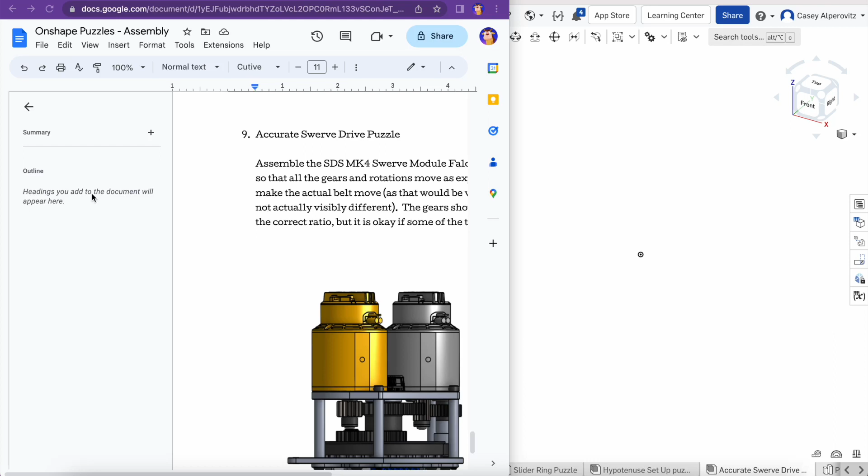Accurate swerve drive puzzle. So assemble the swerve so that all the gears and rotations work as expected. If you were putting a swerve drive on an actual CAD of a robot, you probably wouldn't go into this much detail, because you don't really need to model how the wheels work to do math in CAD. But if you were designing the swerve module itself, like a custom swerve, you might want to model how each one of these turns, so you could figure out if everything's working correctly. It's also a good puzzle, and it will help your CADing skills.

So you need not make the actual belt move. That would be near impossible, and it would look the same, since the belt always is in the same position. It's just the teeth on it that are rotating, and the belt in this model doesn't even have teeth. The gear should turn correctly with the correct ratio, but it is okay if some teeth overlap a bit.

Okay, so what model was this? I think it was the same one from the other one. Okay, MK4L2.

So let's insert from MKCAD. We'll go to our swerve section. This is not grouped together, I remember, so all these parts are floating around.

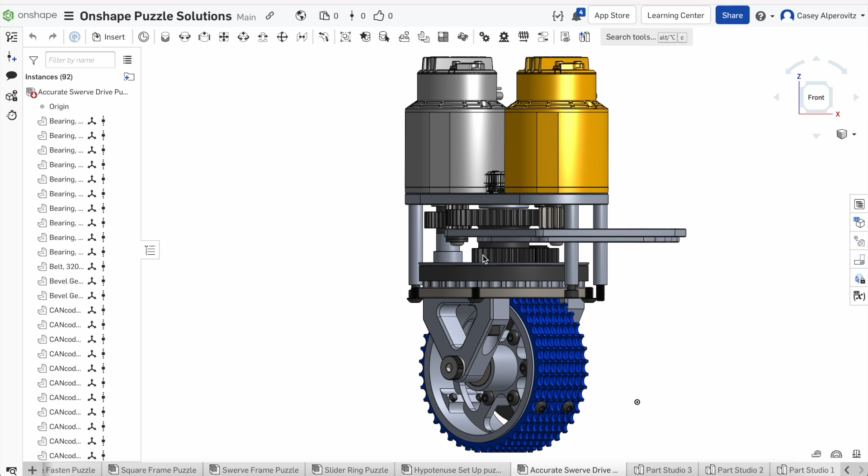This one's gonna take a bit, there's a bunch of things we need. First of all, I don't want parts moving around that aren't supposed to move around. So let's just group it all as one thing for now, and then we can divide and conquer later on. That wasn't the right term - we can ungroup it later on and change things.

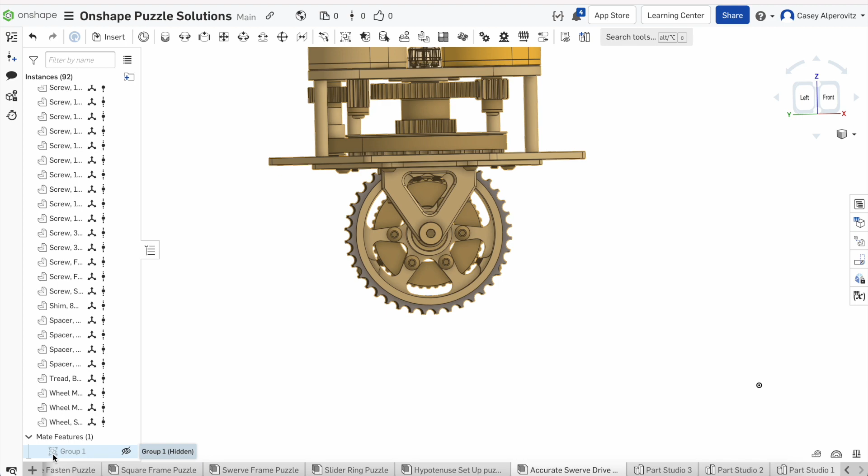So the first thing that I think needs to turn is the wheel. Let's start with the wheel. We want to ungroup the wheel from the rest of this assembly. I could select every part, or let me just delete this group, and I will group together the entirety of the wheel. Let's make sure I get all of it.

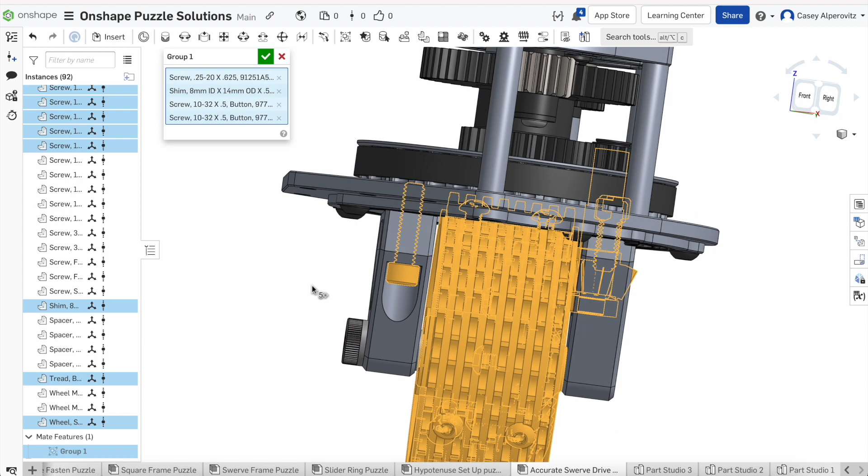We want to exclude these parts, because this is where the wheel will rotate upon. This part was selected, it doesn't need to be. These screws were selected, and they shouldn't be. These screws should have been selected, because they may not look like it, but they are part of the wheel. This part shouldn't be selected. This part shouldn't be selected. This screw attaches the frame, so these shouldn't be selected. This screw shouldn't be selected. Okay, I think that's the whole wheel, but if it isn't, we can always change it later on.

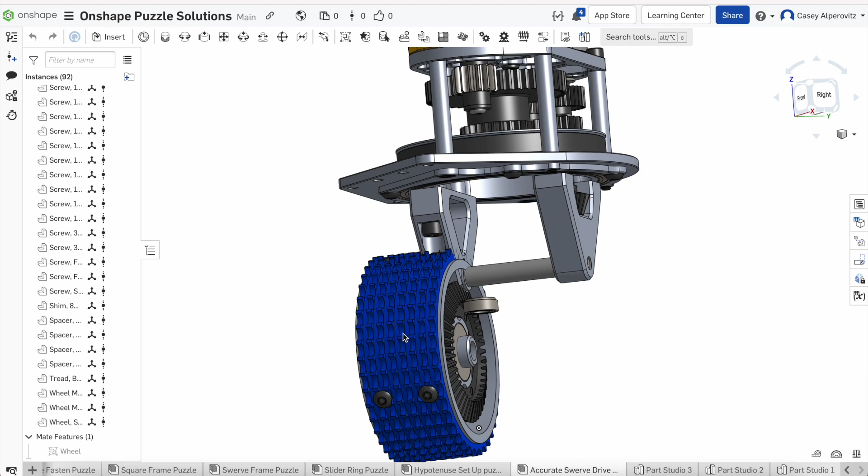Wheel. So now this is all one. Okay, if we drag it and see anything that looks like it's missing... Oh, what happened here? Where is that part from?

Yeah, what does this part do? This part looks like it attaches to here. So, I think I need to unselect that. There we go. And now that the wheel, I think this is like this - these are actually offset a little bit. We can drag our wheel away, and for now, we can group all this.

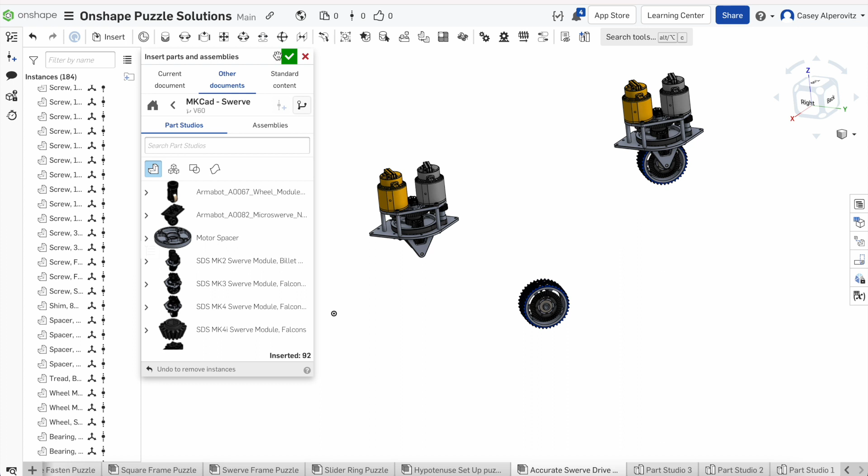Let's actually insert another one of these so we can refer to the right dimensions. This will be our reference model. Now, we want to do a revolute mate for this wheel. Oh, I see, this axle wasn't even part of the wheel. How far away is the wheel from...

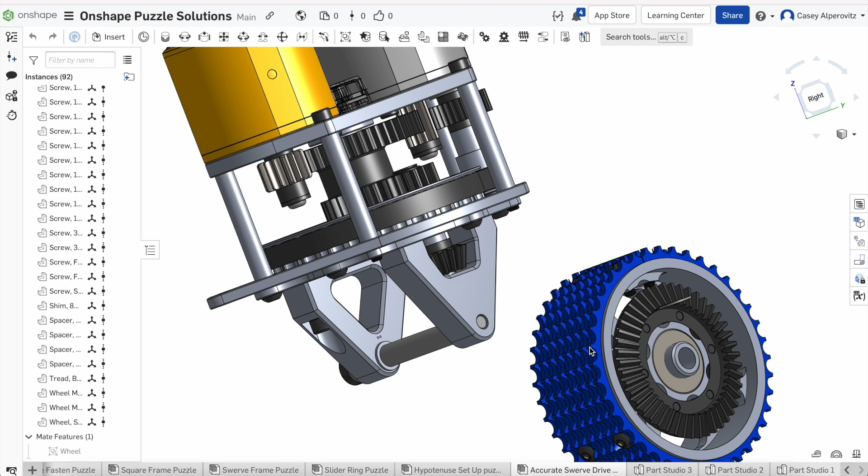Oh, here's another part I forgot to drag out of the group. So, let's go back and do that. This is going to take a while. Okay, let's figure out what that part was again - this little part right here. Shim 8, okay, that's easy, because that's right here. And we can just unselect it. There we go, yeah, now I think I've got it working.

I'm assuming... Oh, I didn't mean to do that. Is this right up against here? Yes, it is - face tangent angle. Let me check. Huh.

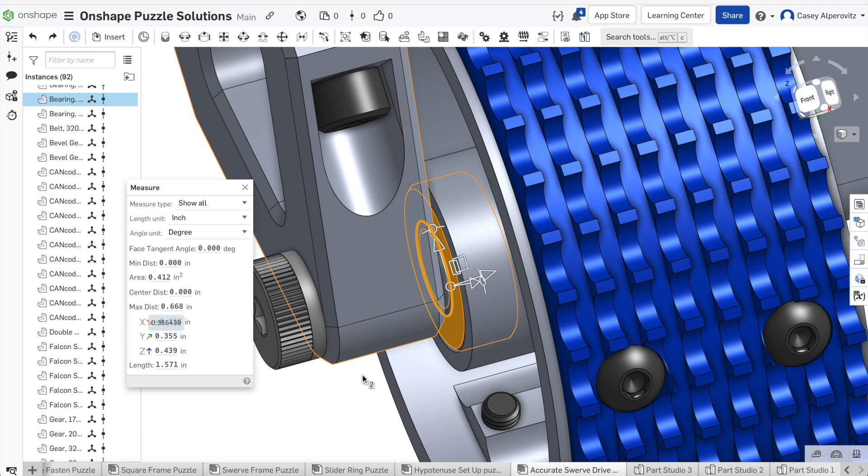Okay, how far away is this from... The wheel's getting in the way now, so I will unselect... I will hide the treads temporarily. You know, I'll hide this part too. There we go. How far away is this plane from this edge? Is this a nice number? 0.048, okay, that looks like a nice number.

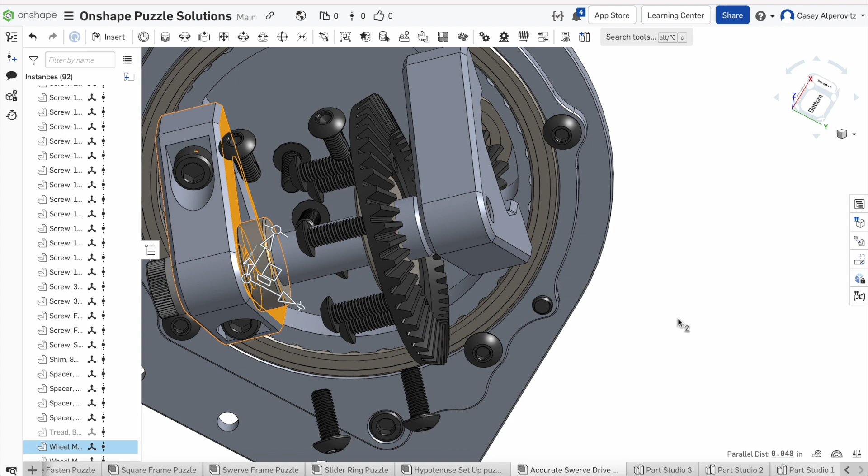So, I can create a mate connector. Let's put it on here and then move it. That - 0.048, it didn't copy apparently. Oh, I moved it in the wrong direction. Why'd it do that? Oh no, I moved it the right way, I just didn't select the right thing.

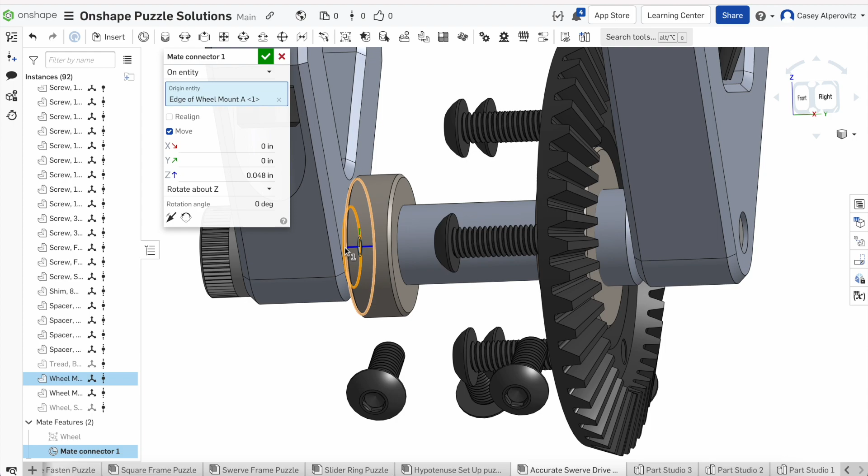We want this circle. Okay. Now, let's unhide those things again. And we'll do a revolute mate between the edge of this and our mate connector.

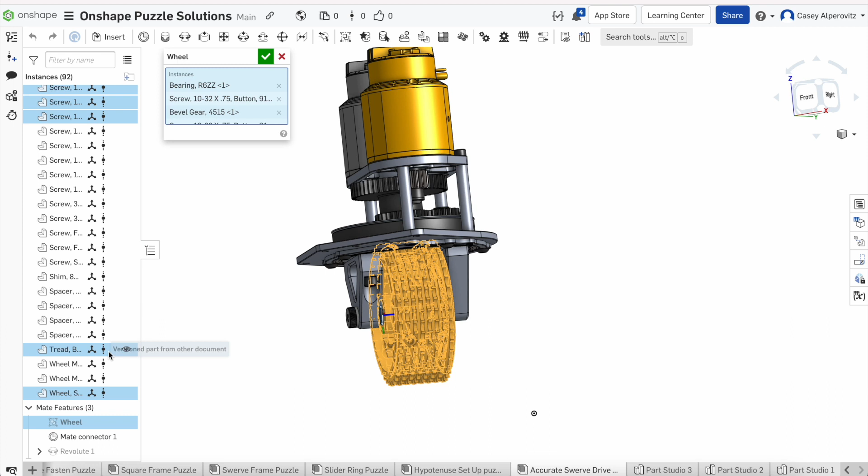And this is not going to spin because this whole part is... Oh, what happened there? Oh, I see why - because I went too far back and I had not grouped the whole thing together. So, give me a second. I can select every part in the wheel by double-clicking on this and then doing this and hiding all the parts in the wheel. Then I can select everything in here and group it again into its main group. Then I can select the wheel parts again and show all of them.

And now, let's mate this to the origin. And now this wheel should spin. Yay! Okay, we did our first step in many steps of getting that to work.

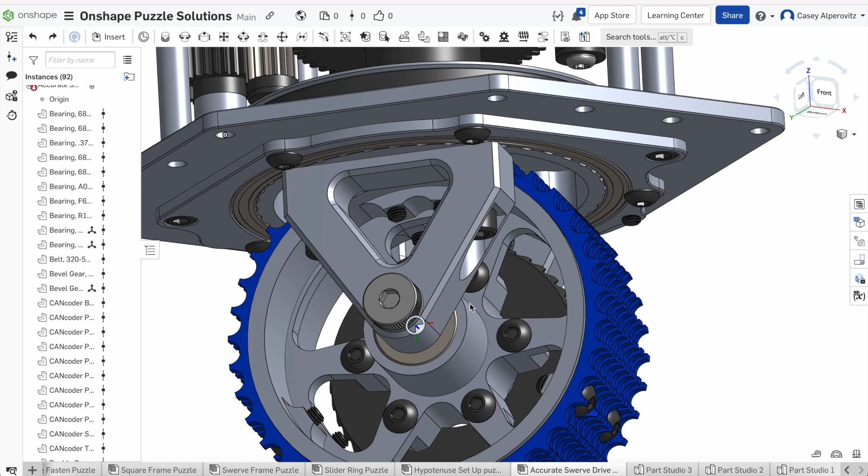Okay, I'm back. So we've got this to move. What's next? This whole base part should spin around so we can change the orientation of the wheel. But right now, it's all grouped together as one.

So we can ungroup this. Let's remove our big group. And I don't want to drag anything here, because then that will happen. So let's see, we'll create a new group. This is all one part, or there are multiple parts, but they should stick together instead of having to fasten each part individually.

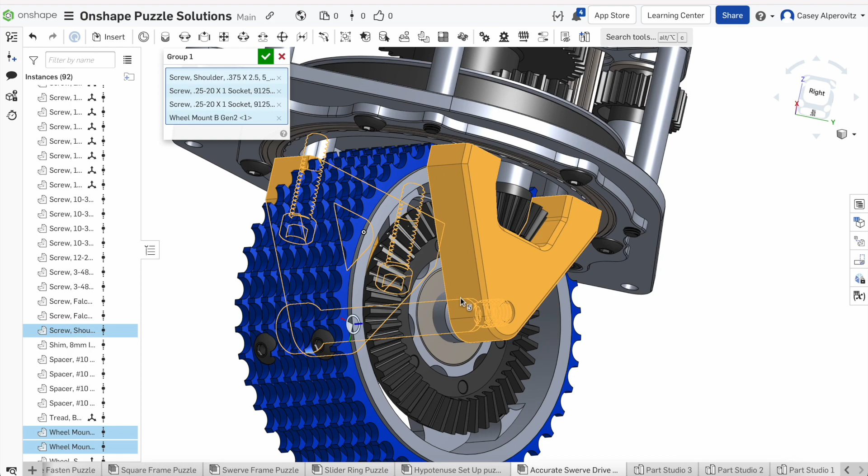This whole part rides on this, and it connects to this, because this whole thing will... Let me check something, actually. Is this right here, is this one part, or is this two parts? Okay, no, that's one part.

Let's go back to our group. Is that everything up there? Okay, these gears will need to turn, but for now they are attached to the same thing. So let's include them in our group for now.

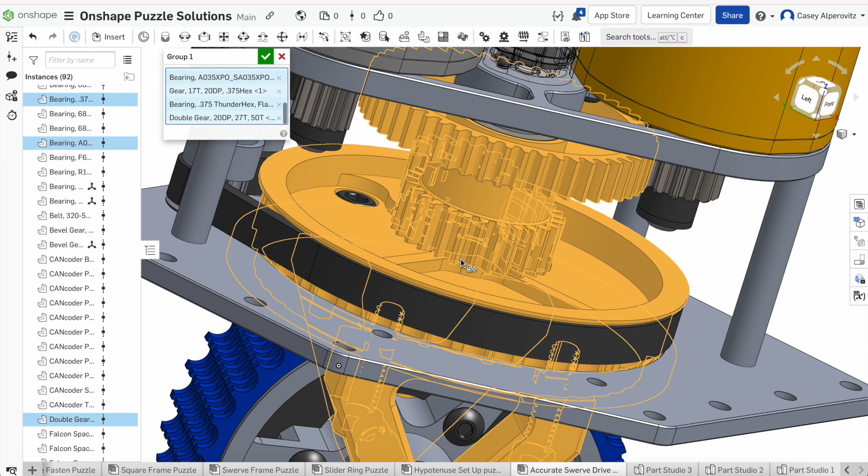No, actually, these parts are attached to the main frame. And okay, that looks like it's all one group. We'll call this center mech for now. Oh, or apparently just center, because I hit enter accidentally.

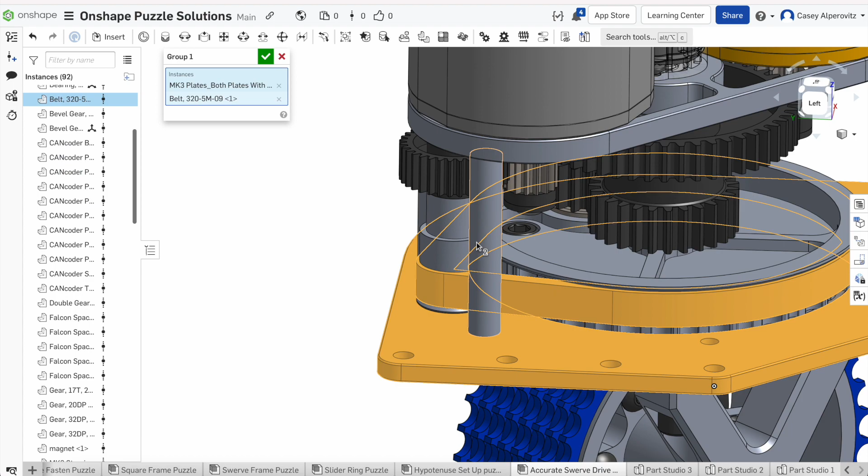And then everything else can go in its own group. Let's select this. These motors are all one big part. Oh, all of these are individual parts. Yikes. Okay, I could just drag over them and hit group after that, but I've already done this. So I'll just... Am I missing anything?

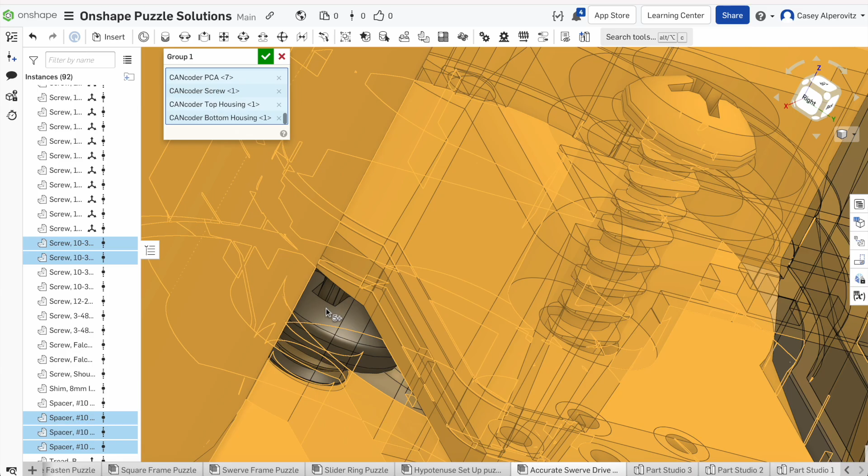How do I get to that screw? Okay, yeah, I'm going to do what I just said I was going to do. I change my mind a lot when I'm CADing.

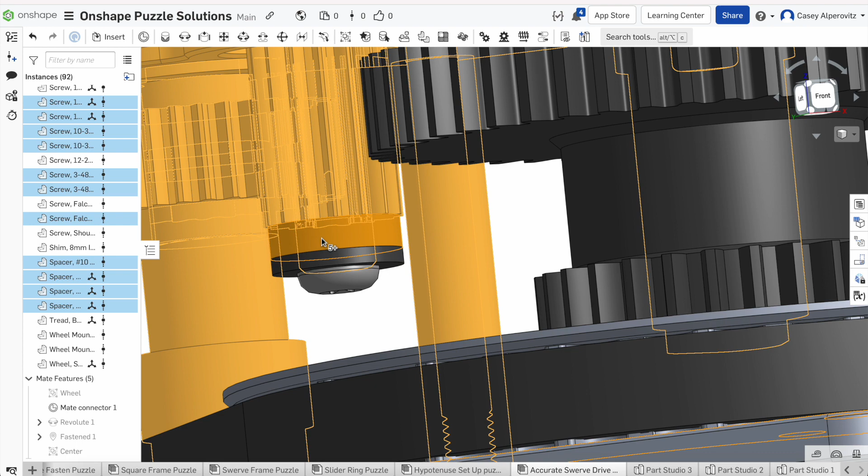Okay, we just select this. That. Select the screw, this part, the gear. Let's select a face, and then it will all form one big group later on. And I think that's all the parts. Let's group it and see if we're missing anything.

It won't let me... Oh, of course it won't let me move it, because I fastened this part to the origin. Let's try moving this, though. Did I forget any parts?

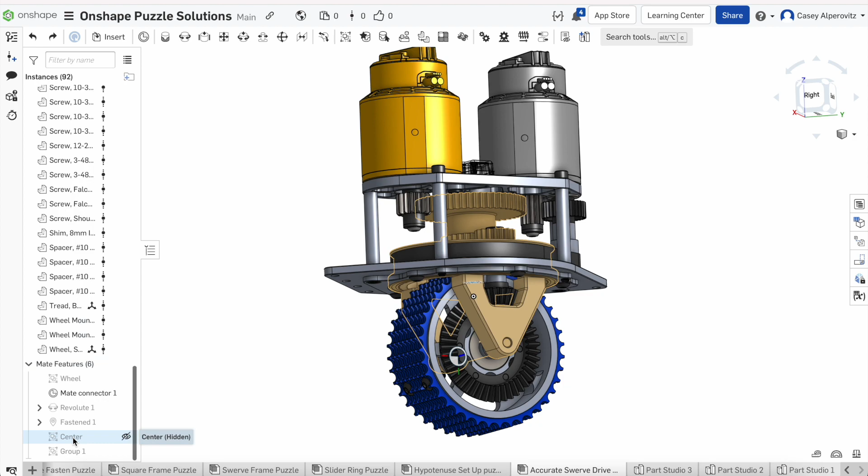Okay, these two screws are floating out in nowhere. And for the time being, this part should be attached. Should it be? Center. Should I attach this part? Let me think about this.

I want this whole part to rotate. So this whole part should rotate around this. So maybe I don't want to select the actual center. Yes, that looks right.

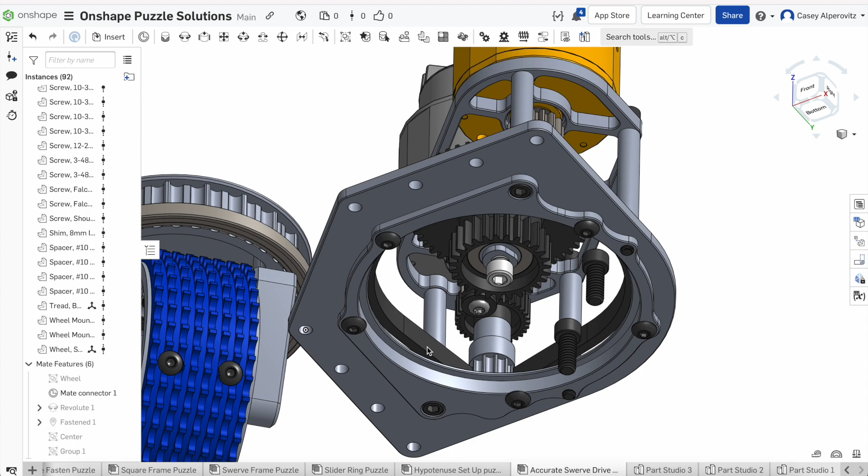Let me make sure I have everything that I need. Those two screws are still floating around. Where do they go? Here they are, include them. And now I think I need to include this part in the big group. There we go, that looks right.

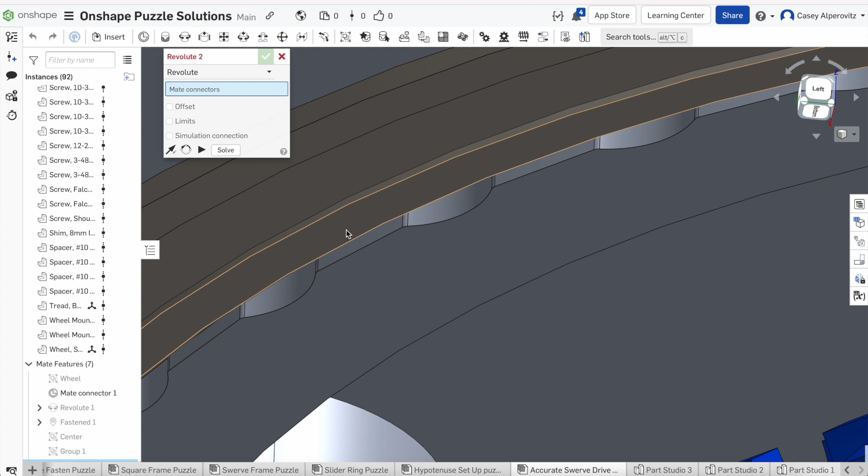So this part now needs to rotate. So, revolute. How do I want to do this? If I select here, that will select the center of this hole, and I'll attach it to the other group. Nope, I didn't select the full ring. Let's redo that.

First of all, let's make sure this and this are at the same height, which they are, because I don't want to change the height of something I don't need to. Let's take the center and the wheel, select them, and hide all the parts just so we can see a little better for a second.

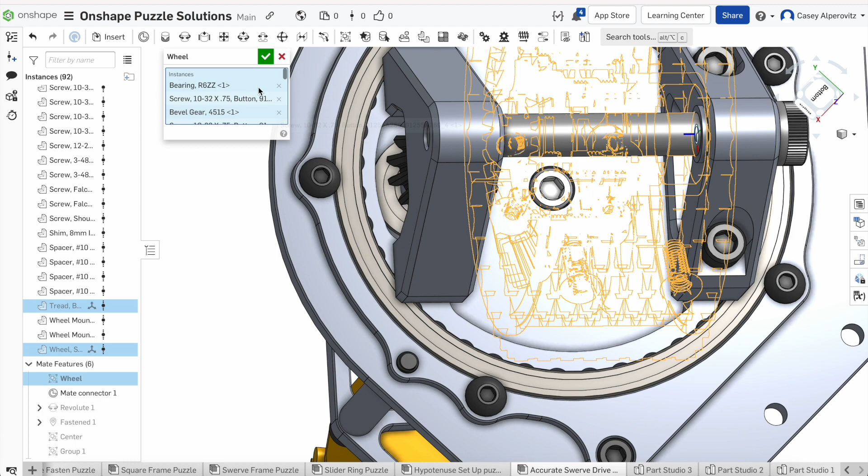Okay, so let's select this revolute mate first. There we go, we got the center now. At first I was like here, and then the center of gravity for the whole part slightly over. Okay, that makes things a lot easier.

Let's bring the center and the wheel back. Show. Where's the wheel? Show. Oh no, I showed the actual symbol for the grouping. I'm going to go into here and then do show. Revolute. Now we need to select our other revolute mate, which can be off of here.

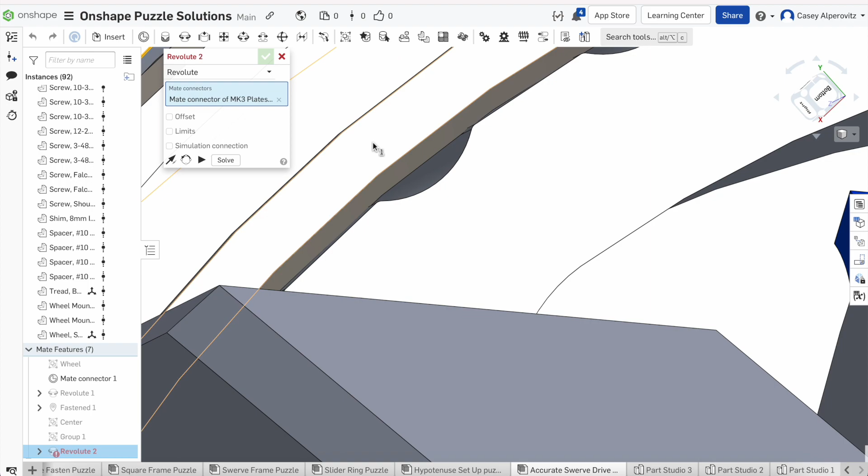Or I'm assuming that's the same height. Let's go off the part we actually checked was the same height. And this rotates. And this rotates. I'm going to undo the position I just moved it into for reasons that will become... Actually, it shouldn't matter. I was seeing if these gears would actually be aligned at the start.

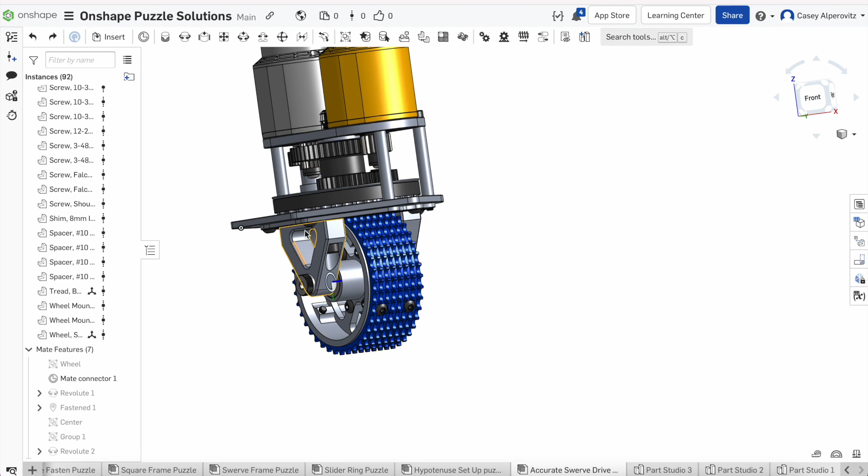No, these gears are overlapping in parts. And that part doesn't matter. It just... having them not overlap, if you can, makes it look nicer. But we're not really going to worry about that. So we got the wheel spinning, and we got this part rotating.

Now, what else needs to rotate? This whole middle section, this tower, needs to rotate. How do we want to do that?

Group 1. Let's unselect these from the center. You know, the wheel's getting in the way. We're going to hide the wheel again.

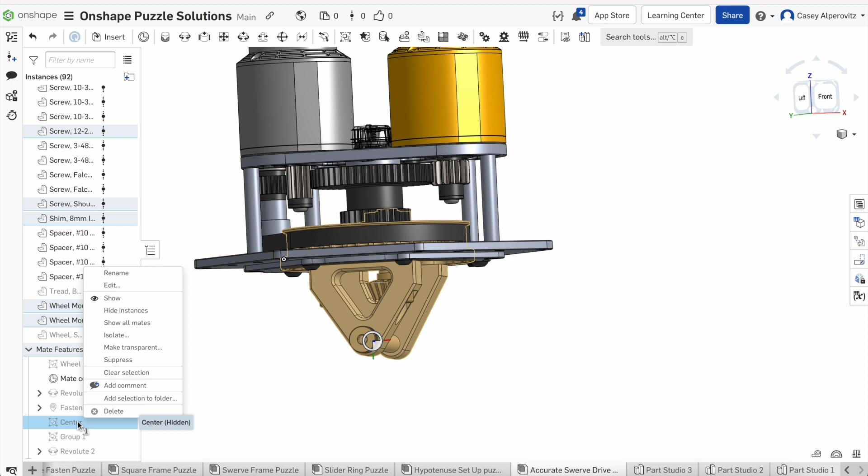Double click, hide. Let's also add the whole center part. Okay, group 1. You know, just so it doesn't move around, this part should also be included in group 1. The screw should be included in group 1. The belt's not going to actually move in our model, so this should be included in group 1.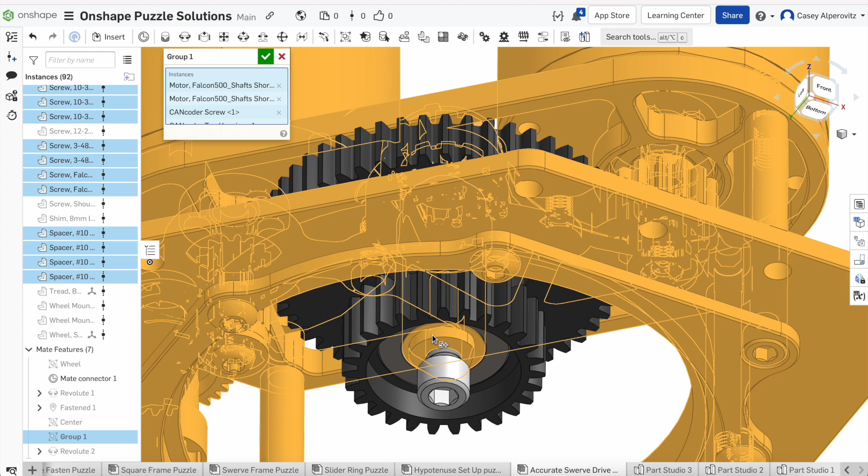Okay, now this should also probably be included. Now let's figure out, because we want to make this part move, are these at the same level? Yes, so we can place a revolute mate there without offsetting anything.

Is this the center or the center of gravity? Okay, this was the center of gravity, see the little mark? But that's not always the center, especially since this part is curved. So I'm going to select the outer circle, and that will center that.

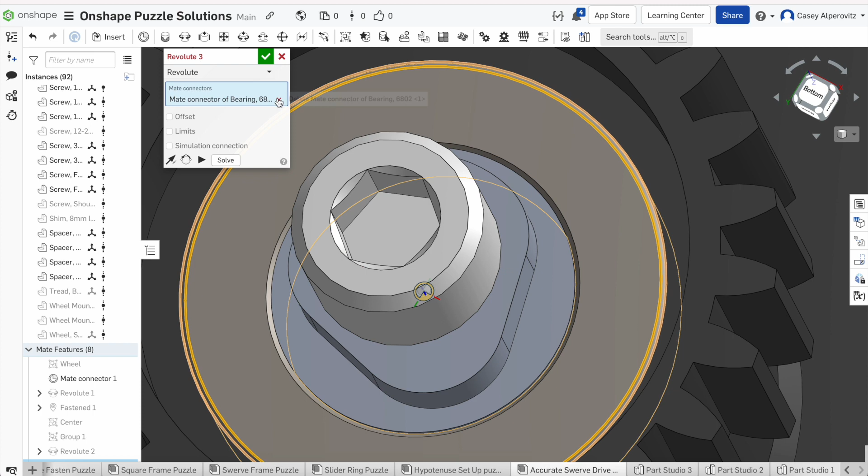I selected this, right? And then we'll select this. And these are now on the same thing. I can test it, make sure it works by...

Huh, oh I see, what? Well, that wasn't supposed to happen. I see, what did I do? Oh, it's just this part spinning and it's not visible. I need to group these things again. Group this to this. Now, hopefully... there we go.

That's spinning. Now, while we have those other parts hidden, let's get everything that's supposed to be spinning up here spinning as well. So this whole axis is supposed to spin. How do we want to make this spin?

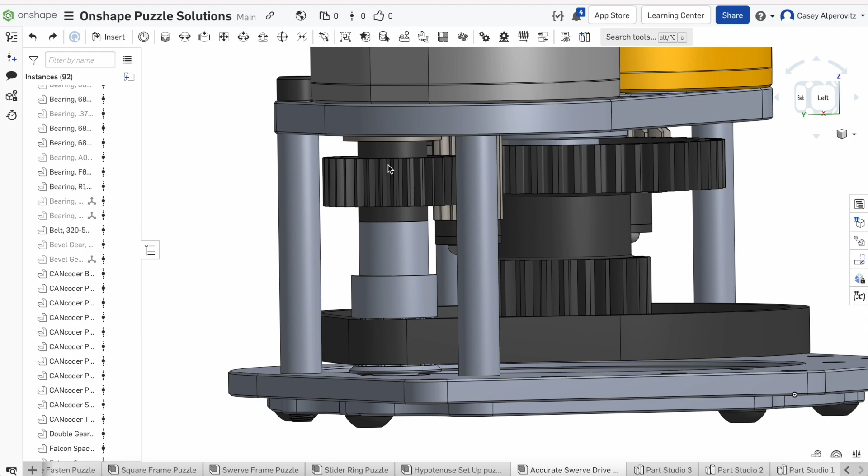First of all, we're going to need to separate it from the big group we have. So where's our... nope, group 1. Let's off-click it. Is this part of the spinning part? It doesn't really matter, I suppose. We could do it either way, since it's not going to be visible.

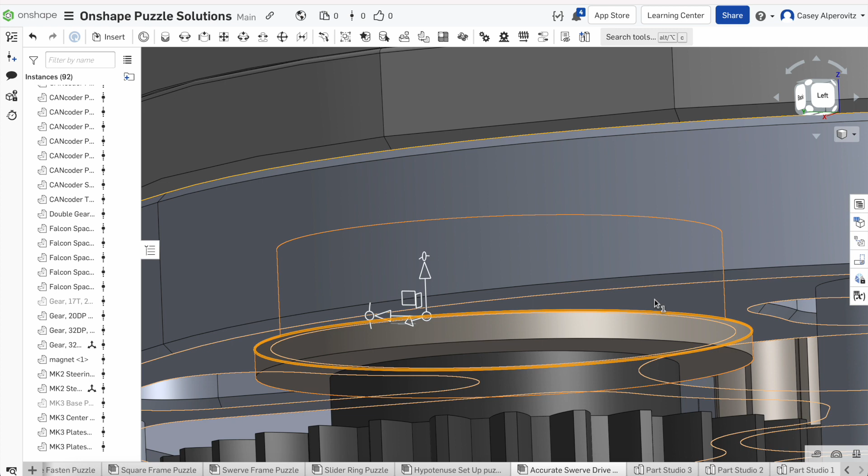What about this part? Okay, let's see, is this flush against here? Yes, it is. Is it? Yes, it is. Okay, now we need to make a group for this.

And this part turns the whole, it shifts, it directs the whole orientation of the wheel. So I'll call this Direction Spire. And we can use our revolute mate.

Select the center of this and the center of this. And what did I do wrong? Cannot be added member of the same group. Oh, I see, I chose parts on the same group. I meant to do

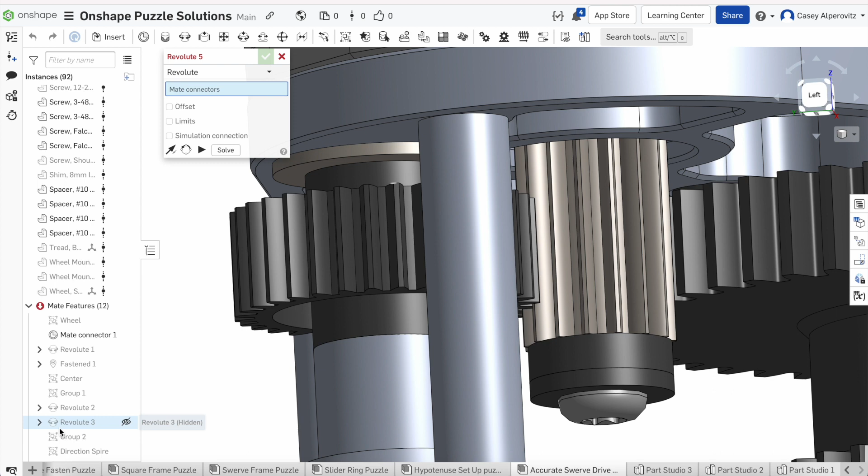this, and this, is that right? Oh, I couldn't select this whole. So you know what, I will actually make this part separate, because it's round, we're not going to be able to see it spinning anyways.

And then I will mate this to this. And because they're not in this... oh, it moved. There's a space here, huh. How far apart are these?

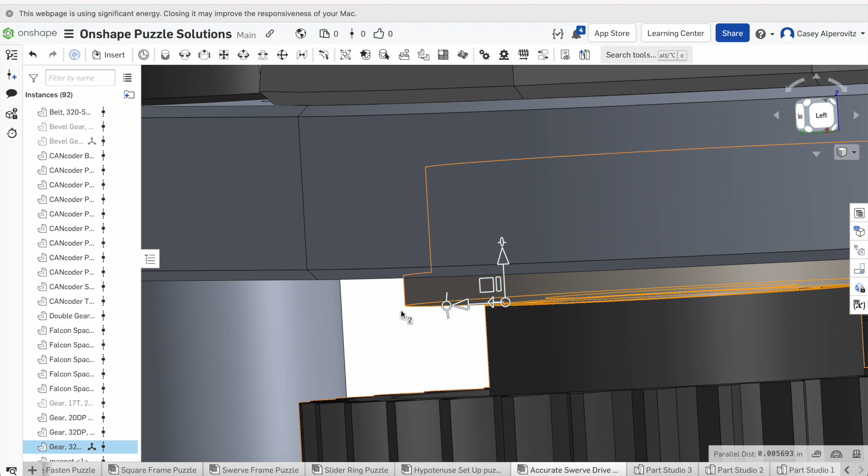Parallel distance - oh, that is not a good number. So let's not offset anything there. If we remove this, is there a hole here? Yes, there is, that's what we'll do.

So we'll go back to our Direction Spire, we'll include this again. We'll do a revolute mate on the edge of this. Then we will hide this little part, and we'll put the other edge of the mate on this circle.

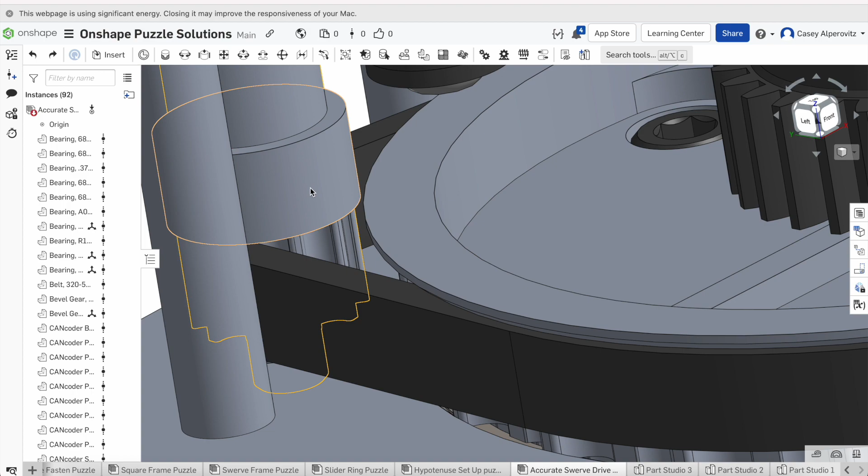Then we can go back and unhide that part wherever it was. I lost it, so we'll just unhide all of the parts, and check to see if this works. Yes, it does, and the bottom part should be spinning as well, as all is one thing. Yes, okay.

Then we need to make this part spin off of the motor. So let's go to our big group, group 1, and we need to unselect a few things so these parts can rotate independently. Is there anything up here? It's hard to see what's up there.

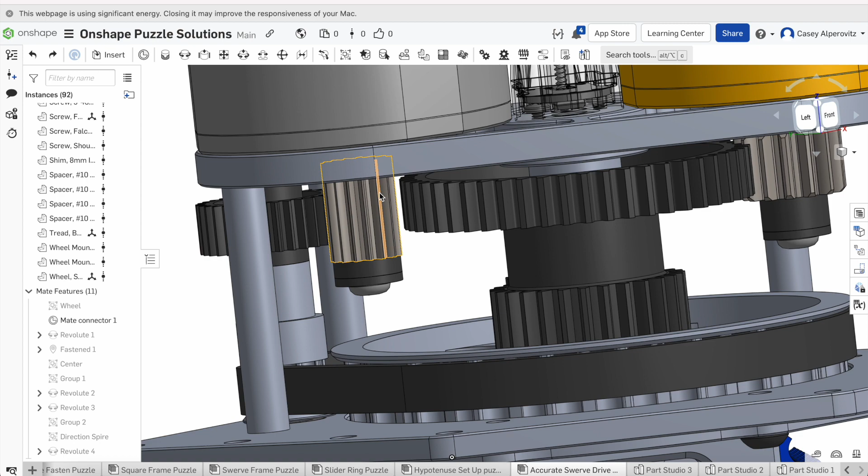Okay, I can always undo this. Let's see what's actually in here. Huh, okay. I see.

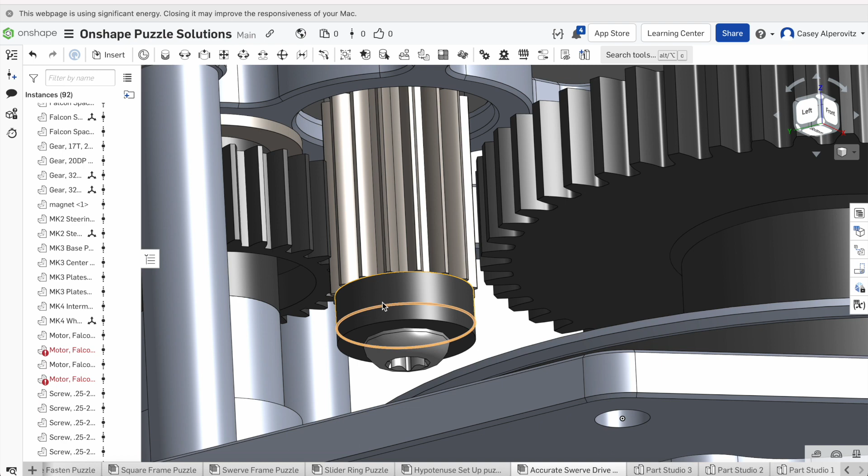Let's see if we can find a solid distance between these. That's not really a good number. You know what, let's do the revolute mate off of this. So it will be like this part's frozen in place, and all of this is rotating off of that. Now, in real life, this part is not floating in place, but it won't matter for our model because A, it's circular - we won't be able to see that it's spinning. And it will have the same function as if it wasn't there, because I don't want to mess with how much I offset this.

Group 1. See, this and this are 0, 0, right? Okay, yes.

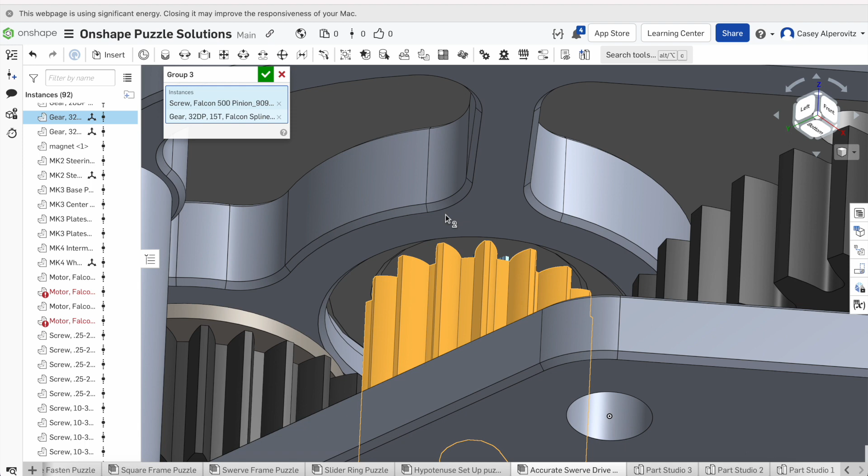Now we need to make a group for these parts. Let's see, what's part of group 1 and what's not part of group 1 again? Okay, this, although it won't really be as visible. These should all be parts of... actually, no, this part should be part of the main group.

And then... these will all be grouped together. Motor spire. We'll do the Grey Motor Spire.

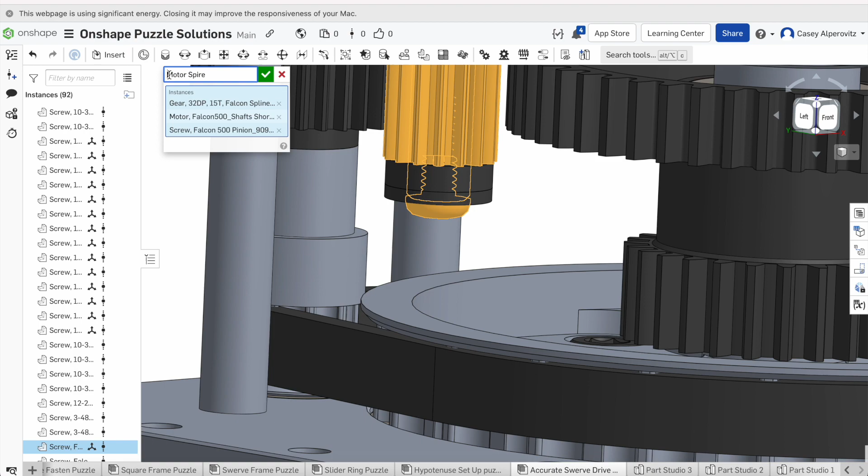Now. Yep, okay, these are all grouped. Did I do that right? Let me drag it out again.

It's hard to tell which part of the motor is actually spinning. It won't matter for this. It's hard to tell what's the axle and what's not, so let's just revolute this.

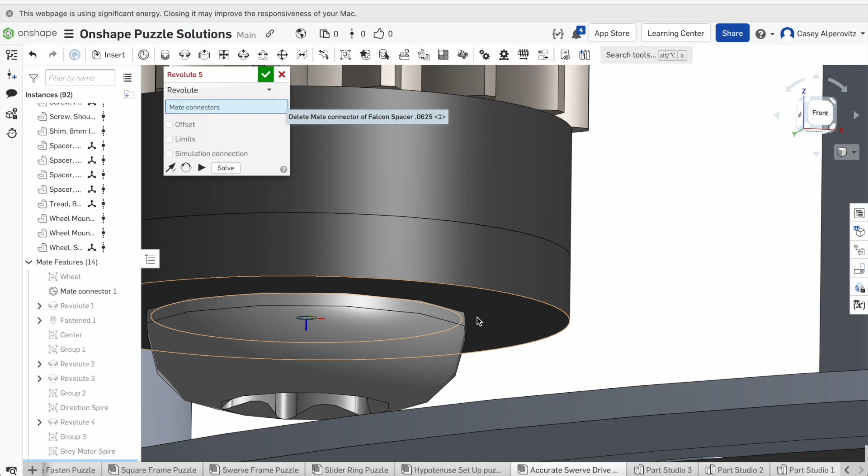Okay, this should spin now. It does. Is that screw even supposed to spin? I'm not sure, I think it is. I don't know, it doesn't have to be perfect as long as we get the general parts rotating in the right ways.

We have to do the spire for the yellow motor, and we'll do the same thing again. So let's go to our big group. We will unselect...

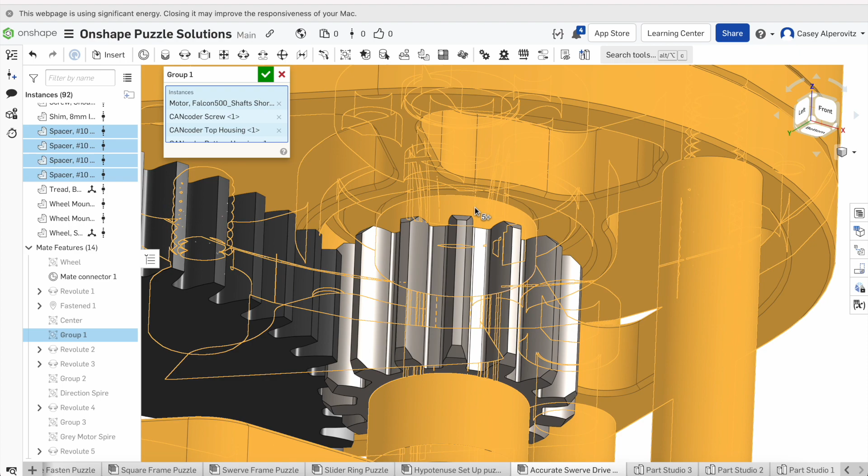Oh no, I didn't mean to do that. Okay. So here I'm having trouble selecting this inner part. So let's cancel out of this. Let's hide this motor for a second.

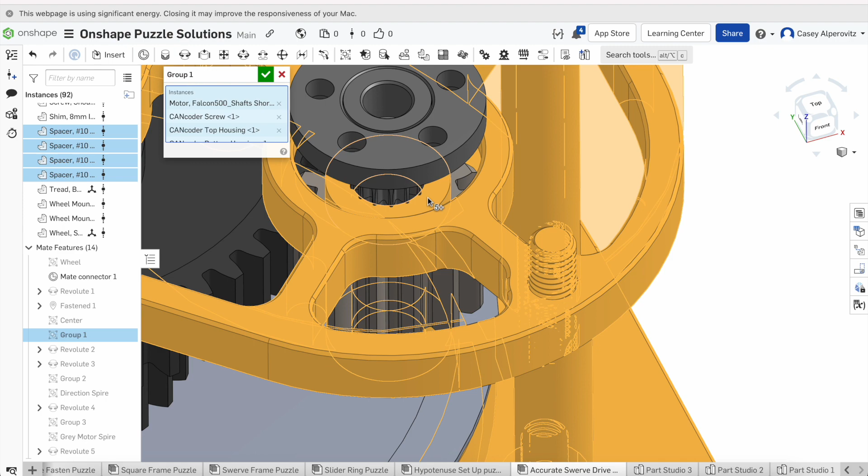And from group 1, let's unselect this, this, this, and that. Okay, now we can group these parts.

Make sure we have everything selected. Yellow motor spire. Make sure we're not leaving any parts that shouldn't be there. Bring this back. Revolute.

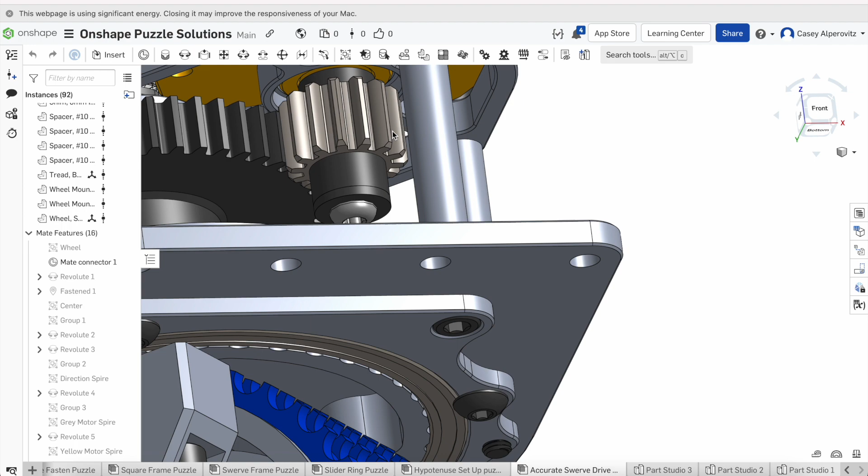We'll test this. Yeah, that's good. Okay, what parts did we not do yet? The wheel spins, the wheel angles.

Oh, that's not supposed to happen. Did we unrevolute that? What happened there? The wheel's supposed to spin.

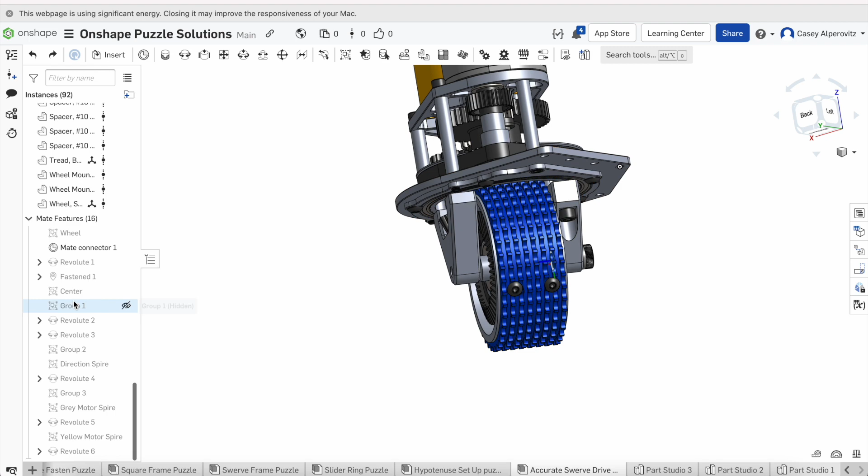Yeah, what happened here? I must have, when I was editing the groups, accidentally... center. This should be part of the center. Okay.

Now this works, and this should spin. Yes, it does. Any parts that we haven't done yet?

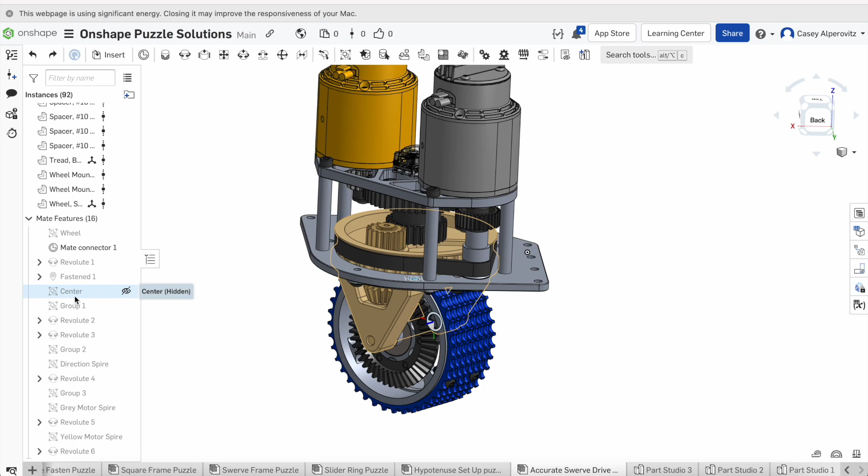This axle needs to spin independently. So let's go to our big group again. Nope, let's actually go to our center group, I think. And we'll unselect this bevel gear.

Does this get unselected too? No, that's the part that will be... it doesn't matter, we could do it either way. Yes, you know what, let's do it.

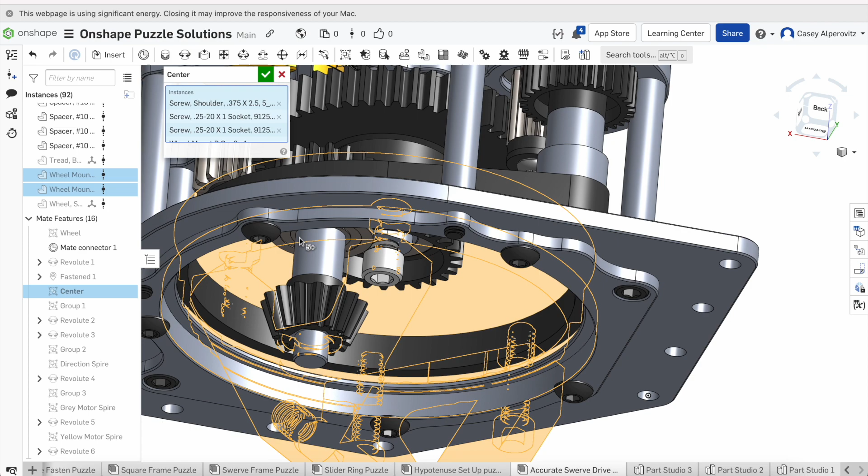Let's remove the wheel, or not remove it, but hide it. And where's our center group? We'll hide that too. Maybe we didn't want to do that. We'll bring the center group back. Oh, what, I just hit it again. There we go.

We do need to connect all these now. Was this part of this little part here? Was that part of the center group? It's a lot of going back and forth.

Well, let's make it so that it's... No, I guess this part should be part of the center. Okay.

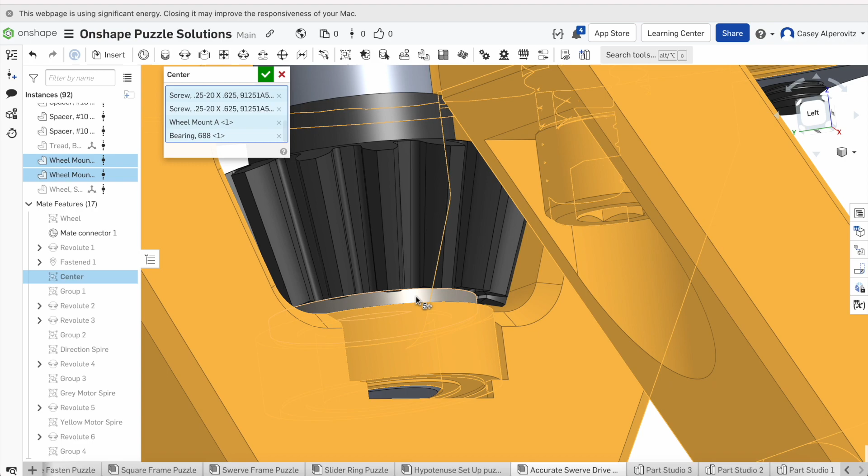And is this flush with this? Oh, it's actually not, it's slightly off. Interesting how it's modeled that way. Well, that makes things a little more complicated. How do I want to do this?

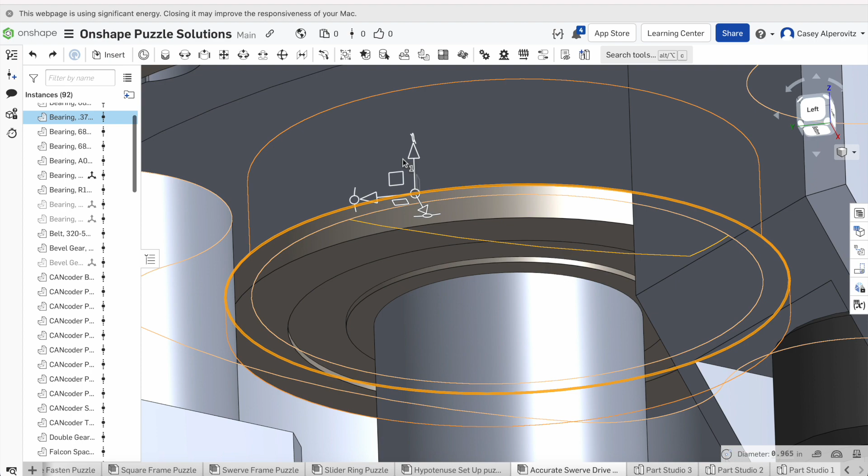Okay, is this bearing the edge of this flush against this? Yes. So we will group all of these together. Where's our bearing? And the gear and the screw on the upper part go as well.

And this part actually spins the wheel, so this will be the drive spire. These are not official names, these are just what I'm calling it at this point.

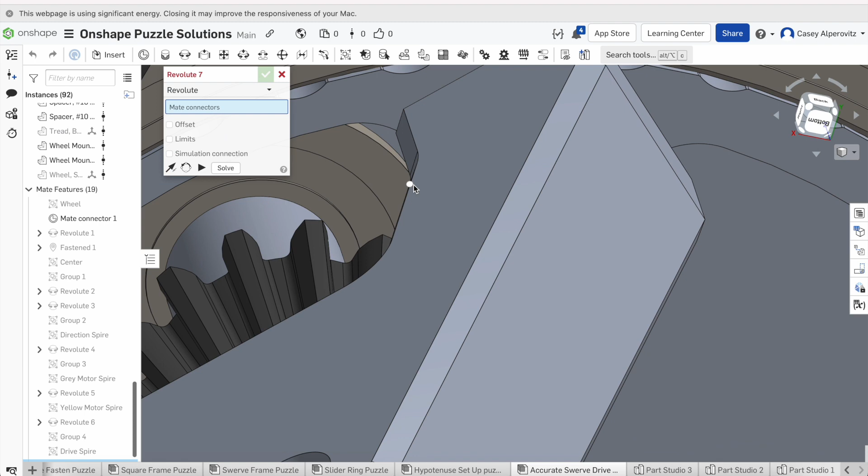Then we want to revolute mate against the edge of that. Then let's hide this for one second so we can get the inside of there correctly.

That looks right. Let's show everything again. Select them all with the shift button, hide, and then make them all visible. Show.

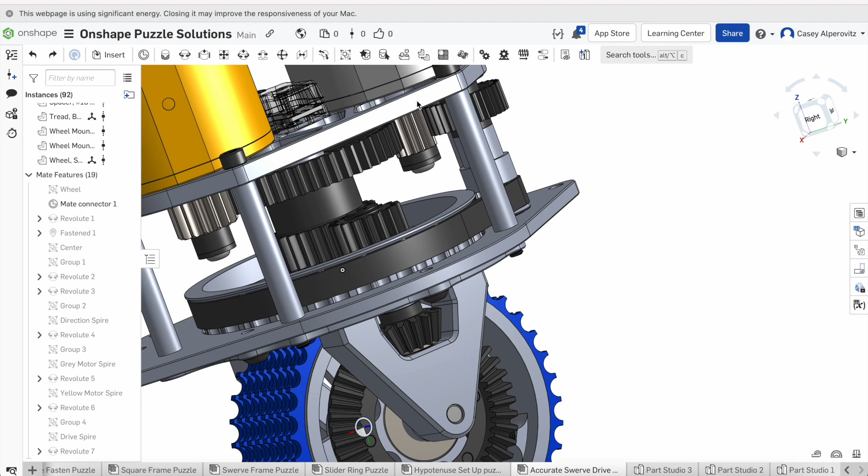That part rotates now. Any parts we're missing? I got this, right? I got this, I got this, I got this. Okay, so now all the parts that should be able to spin can spin.

Let's hide this mate connector. Now we have to relation them. So let's take a look. First of all, let's start from the bottom up. This bevel gear drives this bevel gear, which makes the whole wheel spin.

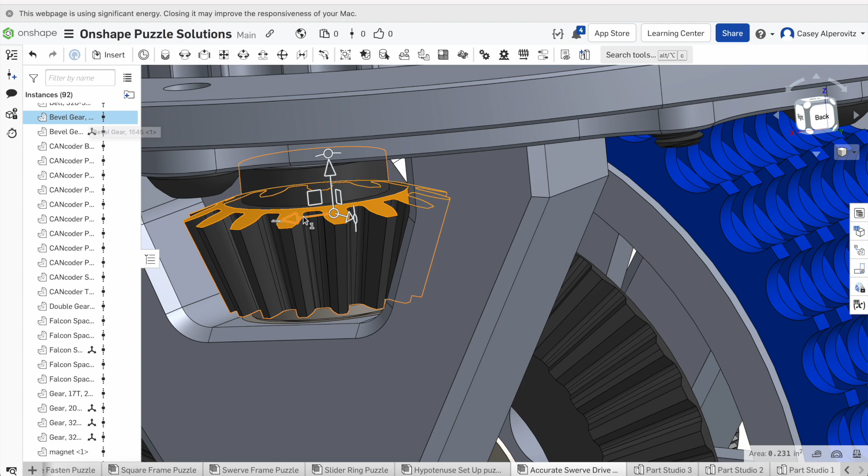And we want to ratio these by the number of teeth that they have. So occasionally it will tell you how many teeth. I believe when I made this puzzle I deduced that there are 15 teeth here, which means there are 45 teeth here. I believe I did double check that.

But we want to do a gear relation between the revolute that moves this gear, which was 7, and what revolute moves the whole wheel. That's our first one, right? So 1 and 7. Revolute between 1 and 7.

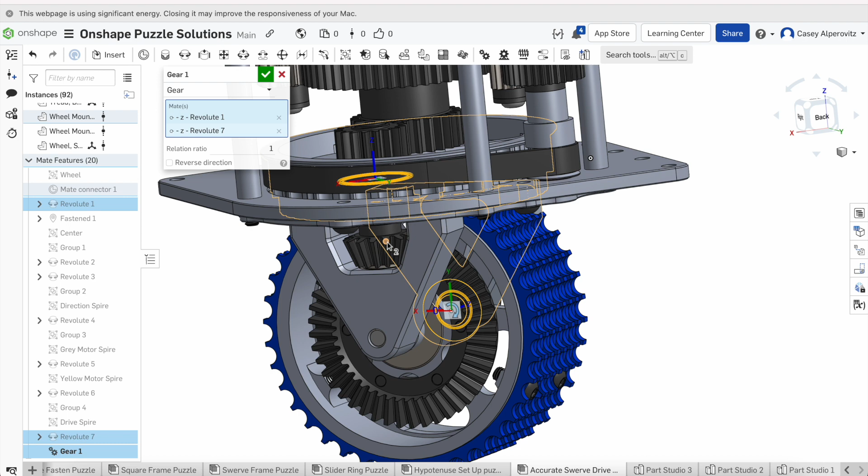And since we selected 1 first, for every time this goes around once, it should go multiple times around on the inside. So that's 45 divided by 15, which reduces to 3. Does that look right? Okay, good, and it's going in the right direction.

So those are now adjusted correctly. These two gears should affect each other. So if you click on the gear, it will tell you 17 teeth, the 17T, that's what it means. And 27. So 17 to 27.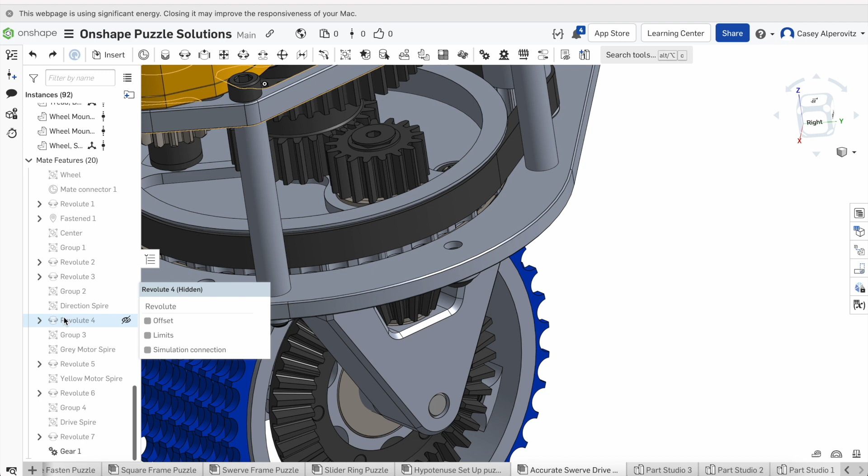So what, this is revolute 7. What revolute is this? I think it was revolute 3. Yes, that looks right. So revolute 3 to revolute 7.

We'll do another gear relation, revolute 3 to 7. So I selected 3 first, or we could change these around. For every time this goes around once, this will go around multiple times, so the bigger number should be on the outside. It was 27 to 17, I think.

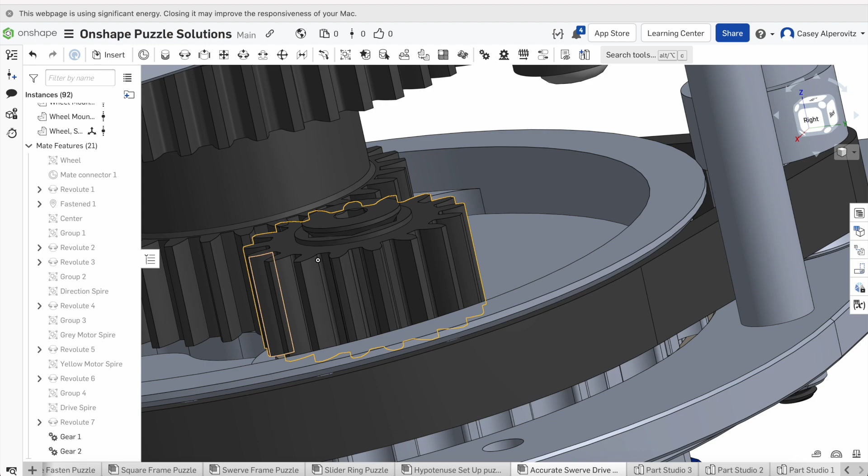Except, look, they're not meshing correctly. When I turn this counterclockwise, the other one moves counterclockwise, and we don't want that here. So we want to click reverse direction. Now, you'll notice the teeth are overlapping. You could angle it so that doesn't happen, but for this challenge it doesn't really matter, as long as the gears are ratioing themselves correctly.

These should spin together. So what revolute is this? Revolute 6 and revolute 3. So this is 27 teeth. How many teeth are on here? 14.

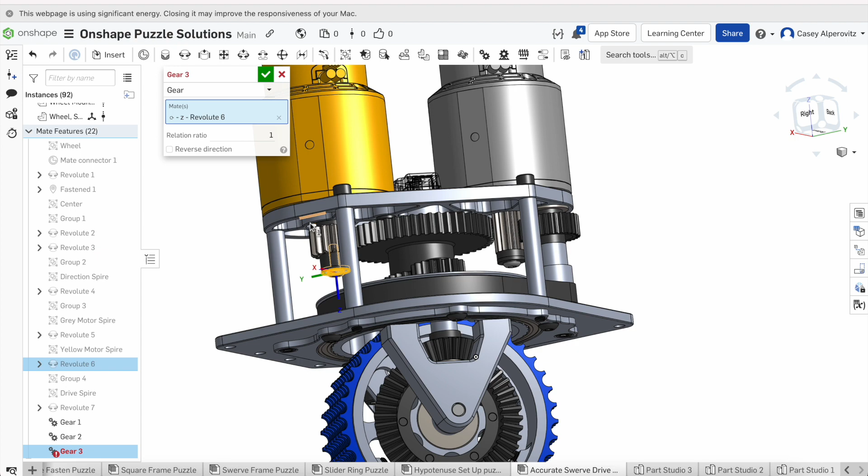What revolute was that? Revolute 6 and revolute 3 need to be geared together. So revolute 6 and revolute 3, and I chose 6 first, which is the smaller one. So the smaller ratio should be on the outside. 14, well, reverse direction already, and 27. Let's just make sure I did that right. Let me check that looks right. Yep, that looks right.

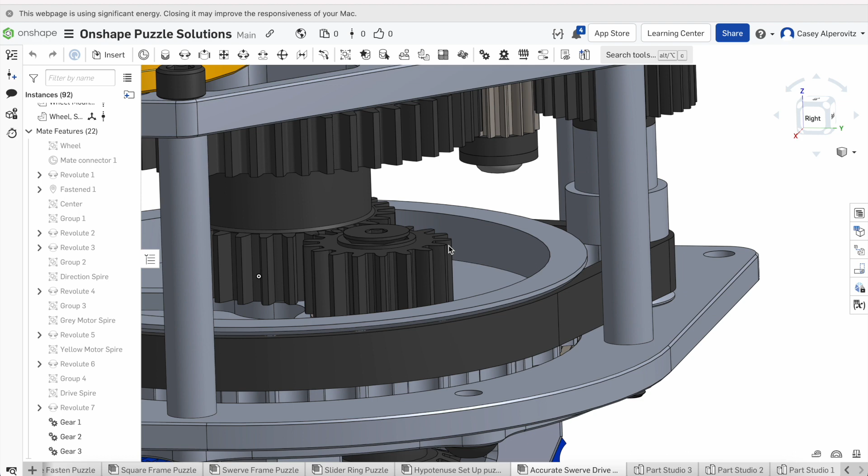Okay, wait, are they rotating the right way? Yes, they are. And you'll notice now when I twist this gear, since it's all ratioed across the whole thing, the other gears will start to rotate in their correct spots too. Does this move that? Yes, we have that covered, right? Okay, good. What else do we need to do now?

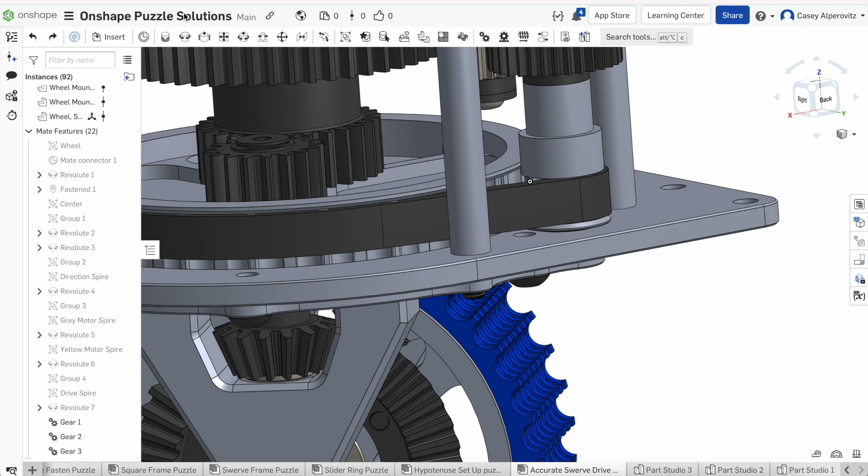This should turn the whole thing around. So what revolute is that? I think that's revolute 4 and revolute 2. So we need to count. This is by belt, we're not going to reverse direction here. So we need to count how many of these little spires are on this peg, and here on this larger wheel it's every other peg that turns it. So I forget what the exact ratio is. You could go count each one individually, but I'm actually just going to refer to what I did when I actually did this myself.

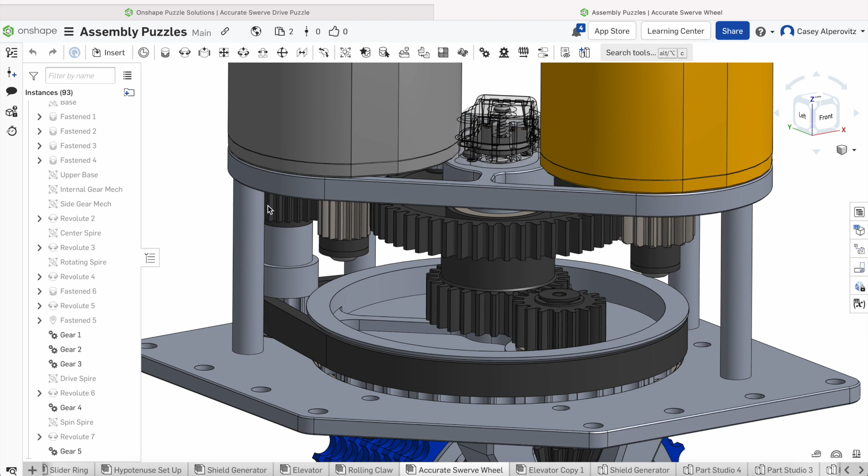So assembly puzzles, let's see the ratio I used. I might have numbered things differently. So revolute 3 to this revolute. Revolute 1, revolute 2, revolute 3, revolute 4. So revolute 3 to 4. This was 4 to 5. This was 2 to 3. This was 3 to 6. This was 7 to 4. This was 1 to 2. Did I not do that? 2 to 3, or maybe I just... No, I did. I'm just getting lost in the numbers.

Revolute 3 is this whole part, right? Oh no, that's the upper part. Revolute 1 is down here. Revolute 2 is that. Revolute 4 is that. Revolute 5 is this. So revolute 4 to 5. Okay, it was 9 to 41. That's the answer I wanted.

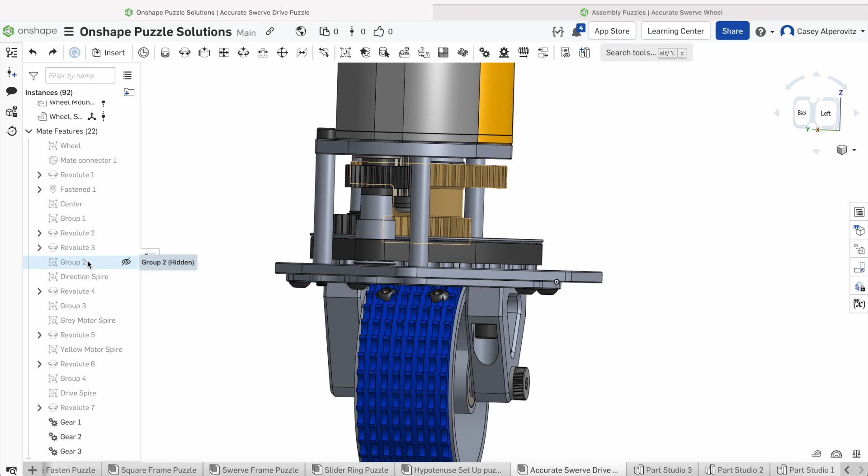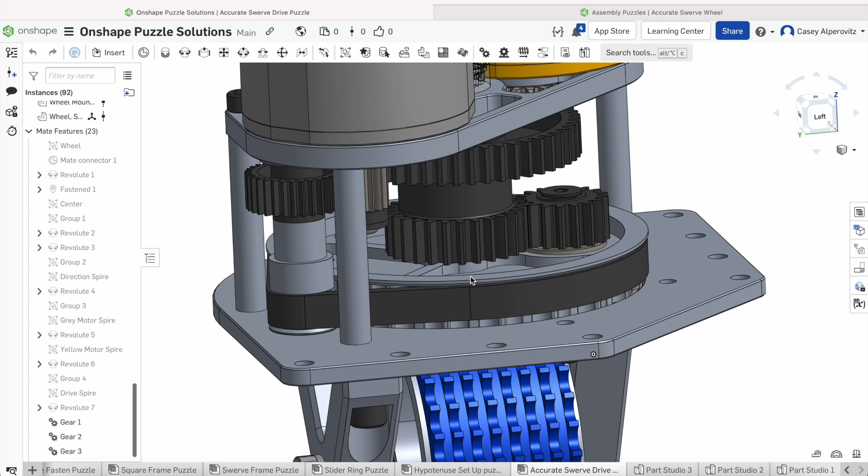So for every time this goes around, this should go around multiple times more. So the larger number... what was the ratio again? It wasn't this one, it was 9 to 41. So the larger number should be on the outside. Let's make sure this is right. Or it looks generally... oh, remember the belt doesn't move. Okay, let me look at that a little more carefully. Let's get rid of the belt, or hide it for a second.

Okay, that looks, I think, the right ratio. However, they're moving in opposite directions, but the belt should move them the same way. Okay, that looks right. I don't know where that... here it is, the belt.

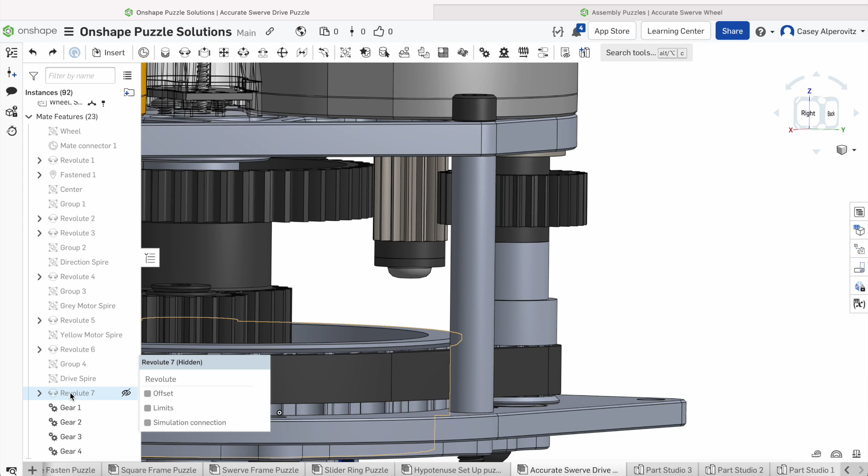Anything else that's not relationed yet? Let's see. Does this... no, that does not drive this yet. So what revolute is that? That is revolute 5 to revolute 4.

And how many teeth are on this? 15 to 32. So we said it was 4 and 5, right?

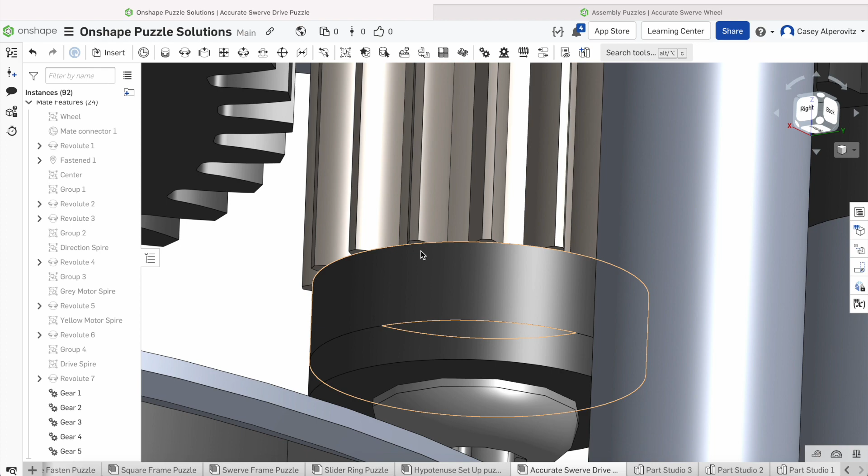So I selected this one first. So each time this goes around, this should go multiple times around. So the higher number should be on the outside. It was 32, 15, right? I need to check. 15. 32. Oh, I didn't mean to do that. Are they going in the right direction? Yes, they are.

Okay, did I get all of them? All the relations I need? I think I might have. This turns that, which turns this, which is going to rotate...

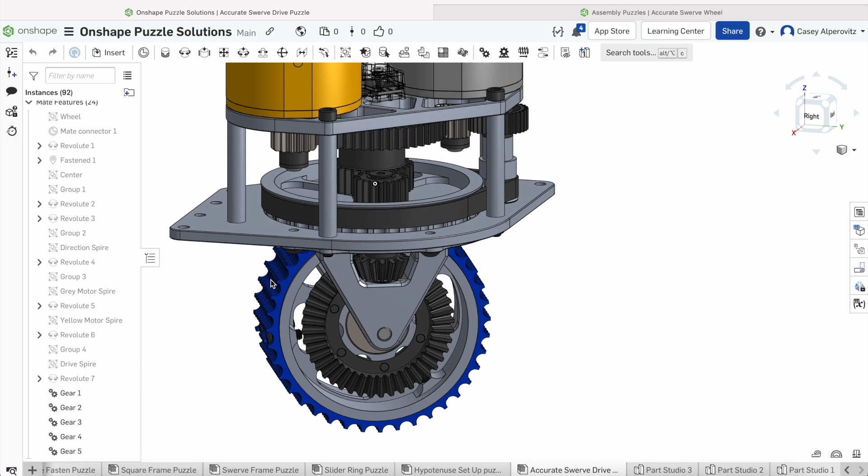What happens if I spin this wheel? This rotates that, which rotates that, which rotates that. That's all good. What about this? What happens when I turn the whole wheel mechanism? This rotates that, which rotates that. Why is this one moving? Oh, I see, that rotates the belt.

And this one should move a little slower because when we're doing that, how Swerve Drive works is we're also rotating, we should be rotating this slowly, which we are. I think so. Let's just follow one of these. We'll select one of these and then follow it. Okay, yes, that should be rotating a little. So that's how you do it.

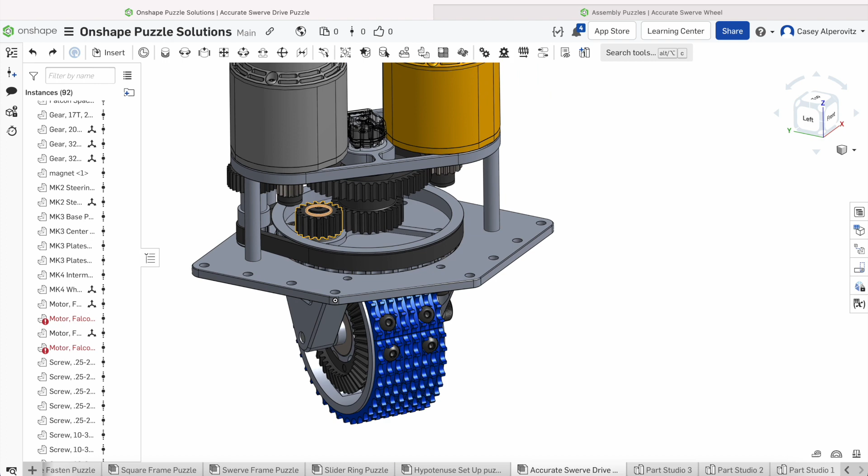That is the solution to this puzzle. And now I can just play with it. Whee! And I can turn this, and this will turn the whole wheel. And I can turn this, and this will rotate the wheel only. So that is the basics of different relations between mates. And that's the end of Puzzle 9. Thank you so much for watching.